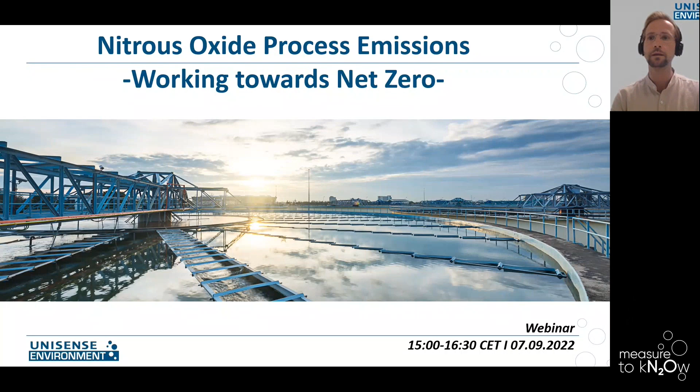Just a quick look at our format today. We'll have 1.5 hours, and we have 3 great speakers for today, representing the leading Danish utilities and universities. Each of the presentations will be 15 minutes plus 5 minutes of Q&A. After the presentations, we will go into a panel discussion where Mikkel Andersen, our own CTO, will join as well, and we'll get to discuss some broader questions.

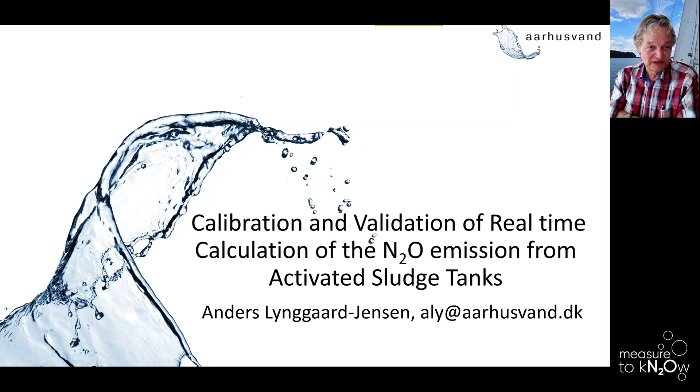Looking forward, thanks a lot. I'll try to share my screen. Yeah, what I'm trying to present today is some practical experience with measuring nitrous oxide and some of the problems and pitfalls that we see, so that you all don't make the same mistakes as we have done.

So the overview is here: how we measure the off-gas flow, how we measure nitrous oxide in off-gas, and how we measure nitrous oxide in the activated sludge, and then the calculations that bind these things together, and then compare the measured and calculated things, and then a few concluding remarks.

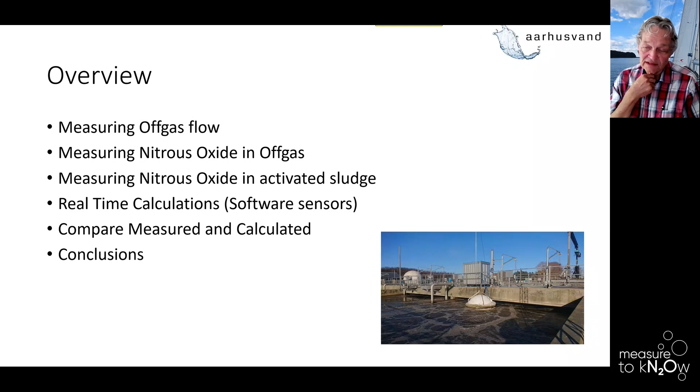So let's start with the equipment for the off-gas measurement, which consists of a hood that you can see here on this slide. Can you all see my arrow? Yes, we see that you will see a pointer.

Fine, good. So what we have here is a hood where we measure flow and off-gas, and we can see that it's located in an aeration field on an activated sludge tank, and this is in fact the Egå wastewater treatment plant in Aarhus. Here we are just in measuring mode, so we are measuring both nitrous oxide and the flow coming up into that 1 square meter hood that we have here.

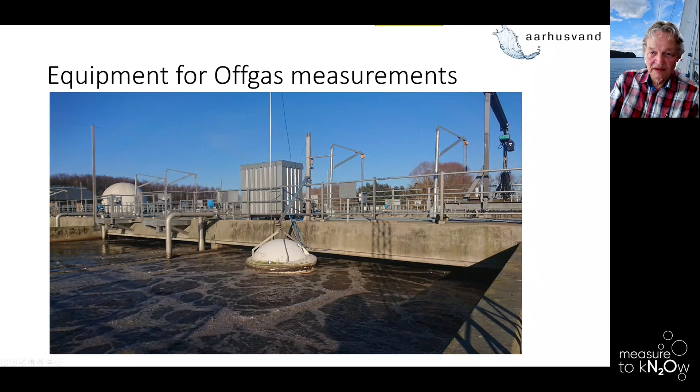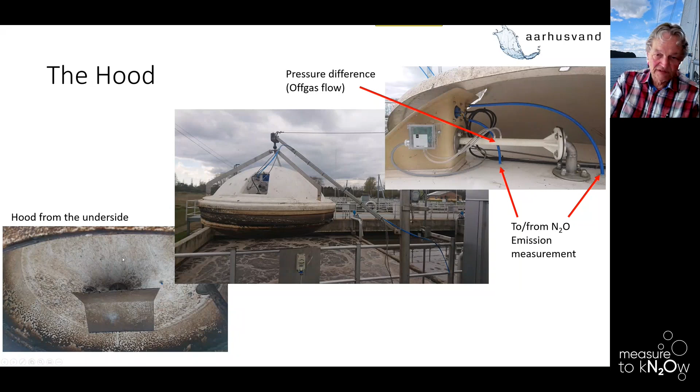If we look into the hood, we can see that we are measuring the flow with a pressure difference, and we have some tubes here going to and from the nitrous oxide emission measurement, which is an instrument I'll present later. We can see the hood here when it's taken up in the crane, and from here we see the hood from the underside. We can see the small tubes where we are sucking in the nitrous oxide mixture, and there's another one, which you cannot really see here, where we are pumping back so that we are not jeopardizing the flow measurement in the hood.

This is the setup for that, and when we are calibrating this, we have made some equipment where we have a diffuser that we can put down and place under the hood. We can see this diffuser pipe is now under the hood, so we can put an airflow to that and measure it during the calibration. We also have the airflow coming from the normal aeration system of the treatment plant, where for this tank we have 6 aeration fields, but we can close down all of them and just use this pipe in order to take the flow that we want.

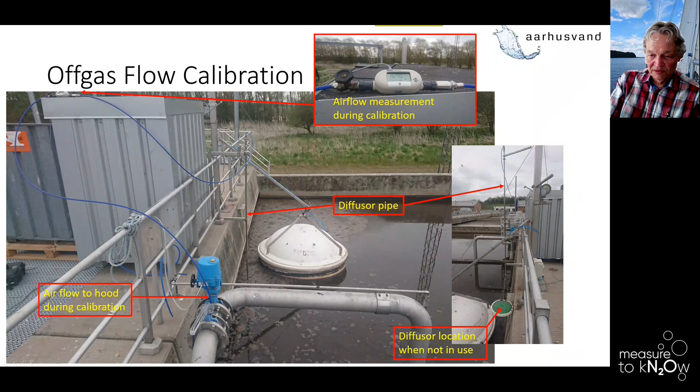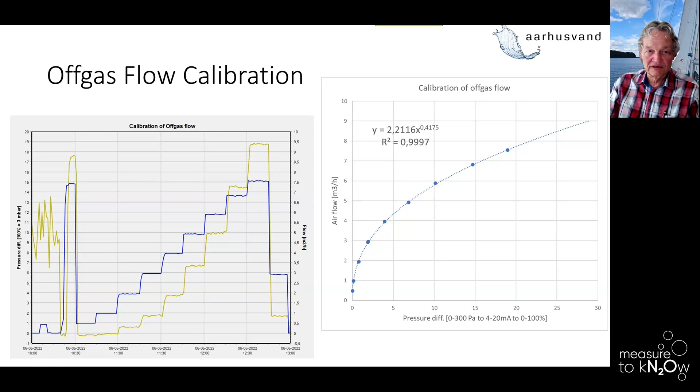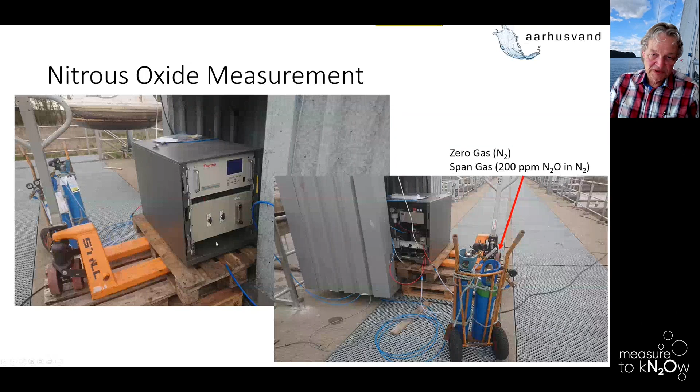Then we have the nitrous oxide measurement with the hood. This is an instrument from Thermo Scientific, which measures using infrared. We have 2 calibration gases, a 200 ppm in pure nitrogen, and a pure nitrogen gas, which we can put on the system. We have a gas pump where we're putting the sample in, a gas cooler, and a filter so we are not getting anything into our instrument.

We can put calibration gas on, we can put zero gas on. We have an exhaust that is going back to the hood, and we are using about 1 liter per minute in the instrument, while the pump is giving about 5 liters per minute, so we are putting back that flow again, not to jeopardize the flow in the hood, even if it's much smaller.

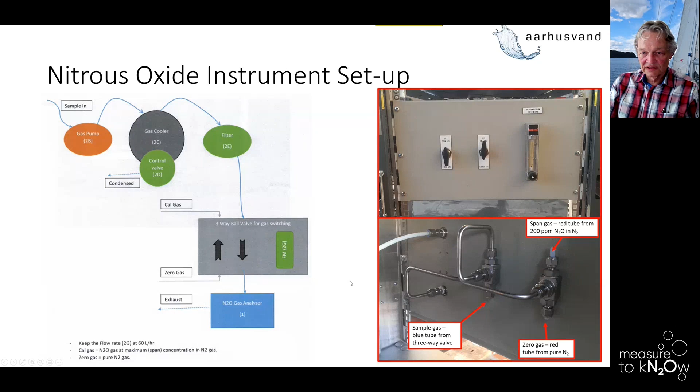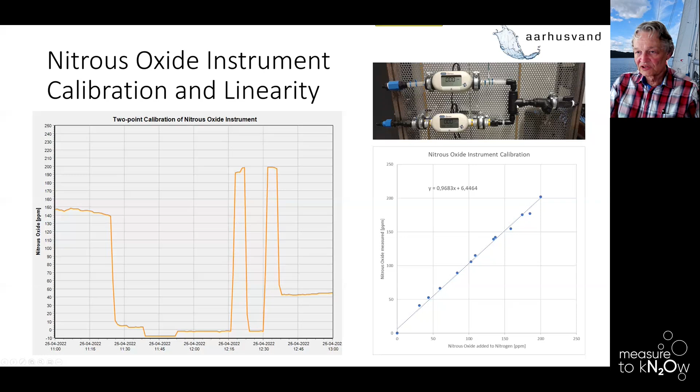You can see that we have different equipment here so that we can calibrate the system. When we are doing that, we can see that we are coming up and down between 0 and 200. We have also been checking the linearity of the instruments, where we have 2 flow meters with the span gas and the zero gas, which we can mix in different ratios to check the linearity of the instruments.

When we are setting up everything and doing our real-time calculations, we now have a system where we can measure the off-gas pressure difference and the flow. We also have a filtered flow, shown in light blue, because we need to filter it. You can see how much noise we have from the pressure going into the flow, and then we have the filtered flow. We have the off-gas in ppm, which we recalculate into a concentration in milligrams per normal cubic meter. By multiplying those two figures, we can get the emissions. So we have the red one, which is our emission from our off-gas measurement, completely independent of anything else on the treatment plant.

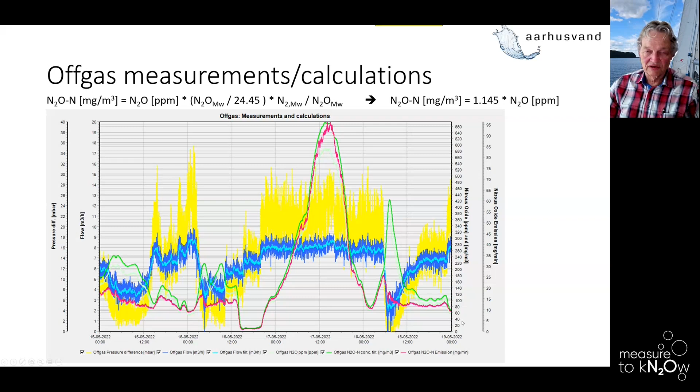Then we are having the other system, which are the sensors installed at the treatment plant. We can see here we have the aeration tanks at the wastewater treatment plant. We can see the flow going through. We have an anaerobic pre-tank here, and then we have the 4 aeration tanks.

It's a plug flow system, coming out here. The hood that we just have been seeing is sitting here, so it's in the inlet tank and in the aeration field. We are measuring the nitrous oxide in these different locations in the tanks, and we are having flow meters on each of the tanks so we can see how much air we are putting into each of them.

I've just shown here some of the measurements we have been doing over a longer period, from the start of February this year until end of June. We can see that the nitrous oxide measurement in the activated sludge is changing a lot in this period.

So we are in fact having different periods here of how much it changes, and it's not just because we are experimenting a lot with the different controls. It simply changed with the same control. We simply changed level around April month. So it seems that we had some other population going up there.

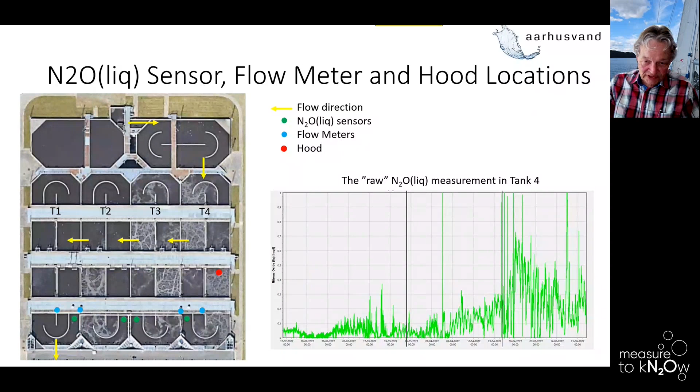So the nitrous oxide sensor, we are having 4 of those, and we are having 2 transmitters, and they're sitting there, just down in the activated sludge. We are having the flow meters that we use for each of the aeration manifolds - those are thermal gas mass flow meters that we're using there.

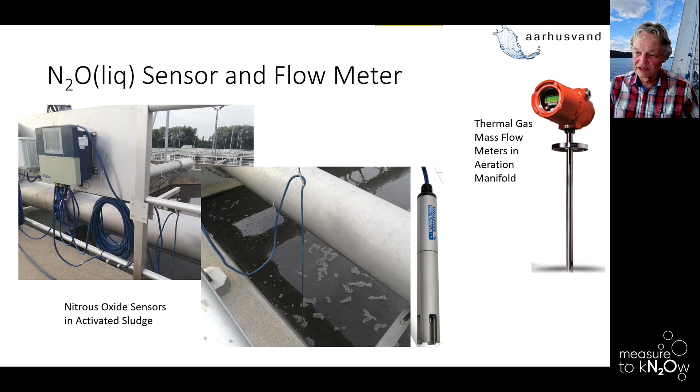Then one of the really difficult things here, when we are now starting to compare our results through the calculations, is how much is the aerated area? How much area is covered by the off-gas meter - saying that has 1 square meter, but how many square meters are feeding or evaporating from the tank?

If we try to calculate that from the cluster of diffusers, then we are having 45 square meters as the area of the diffusers. But when we look at the surface and try to estimate what the area is there, we are then getting approximately 65 square meters.

And of course that area is quite important in the calculations, and also the aerated volume and the non-aerated volume are quite important in the calculations. If we see that at the surface we can in fact see 1/3 more than what we have in the diffuser area, then the volume maybe should be calculated from the mean between these 2 areas here, because we're having a rhombic figure there for the volume. So there's something to work with there.

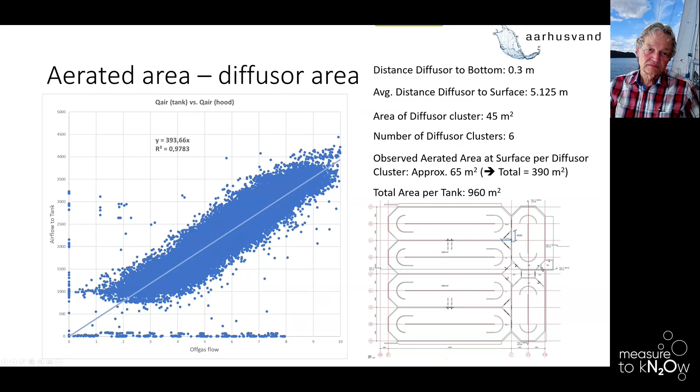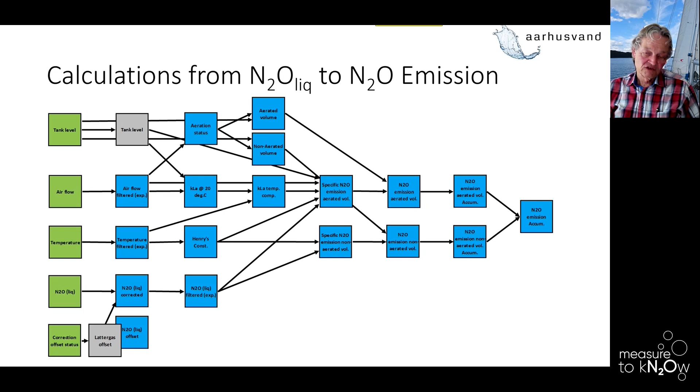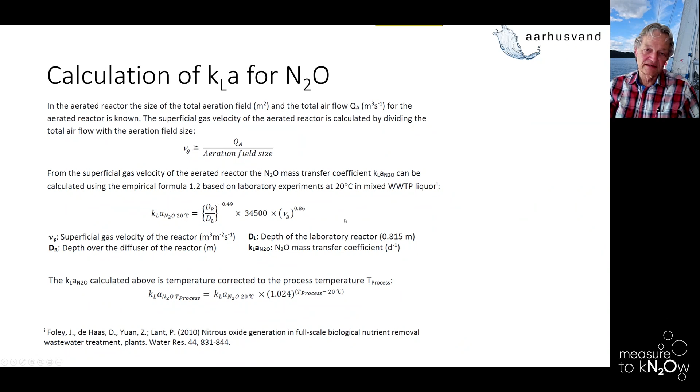So if we look at how we calculate it, you can see this afterwards. I will not use any time for looking at these, but this is the calculation of the KLA for nitrous oxide, and we are doing exactly that in the system every minute. We have the calculation of Henry's constant, which we also do exactly like this every minute.

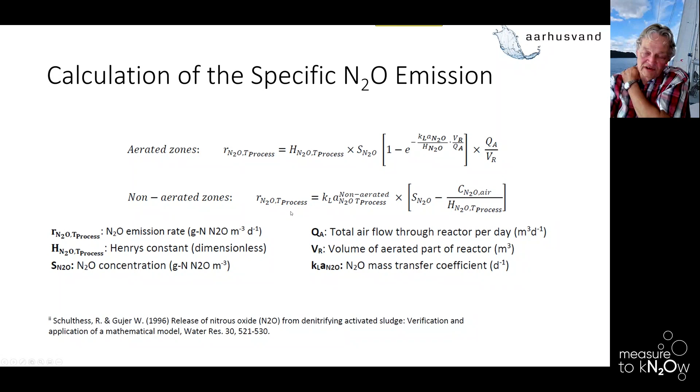Then from that we can calculate the specific nitrous oxide emissions, and we are calculating that also from literature here, and the aerated zones is given by this, and the non-aerated zones by this equation, and you can look at that afterwards in the slides that you have in the PDF.

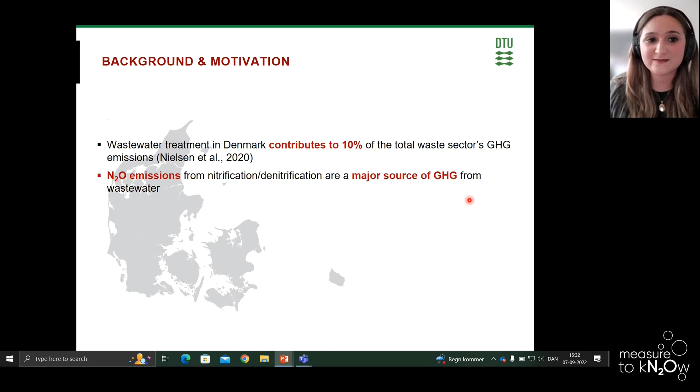How come do we need to look at N2O in wastewater treatment? Well, basically, wastewater treatment in Denmark contributes to 10% of the total waste sector's greenhouse gas emissions, and N2O emissions from nitrification and denitrification are a major source of greenhouse gas emissions from wastewater. But we also know that wastewater has been considered a resource in water resource recovery facilities, where we can recover phosphorus, for example. In Denmark, we also have approximately 51 plants that produce biogas and then energy.

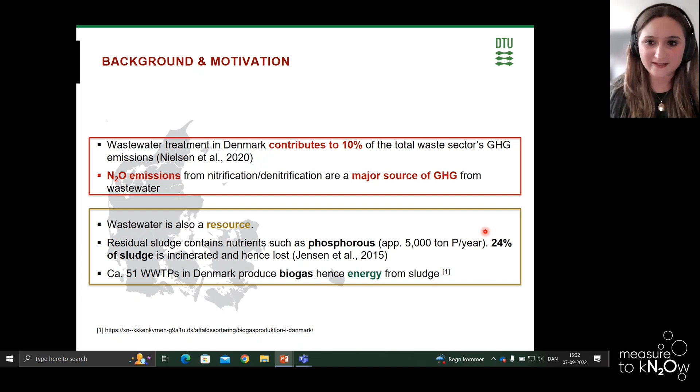So we have this double phase of wastewater treatment. On one side, future water resource recovery facilities need to reduce direct emissions, especially of N2O and methane, but on the other side, to achieve climate neutral plants, we also need to recover as much resources as possible, and do it sustainably. So we need to make sure all these processes happen in a very sustainable way, which means quantifying a broad range of environmental impacts.

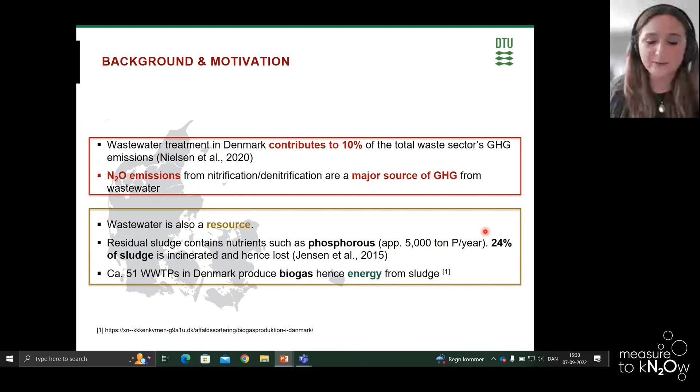Today I'll focus on a specific case study: a plant in Copenhagen called Avedøre wastewater treatment plant. Avedøre has a capacity of 400,000 PE and also produces energy. The future strategy for this plant is that the wastewater operator, Biofos, wants to retrofit it into a water resource recovery facility by 2025. This is aligned with their goals of reducing CO2 emissions, recovering more energy, and recovering more nutrients and other resources, so they can achieve climate neutrality or even be climate positive.

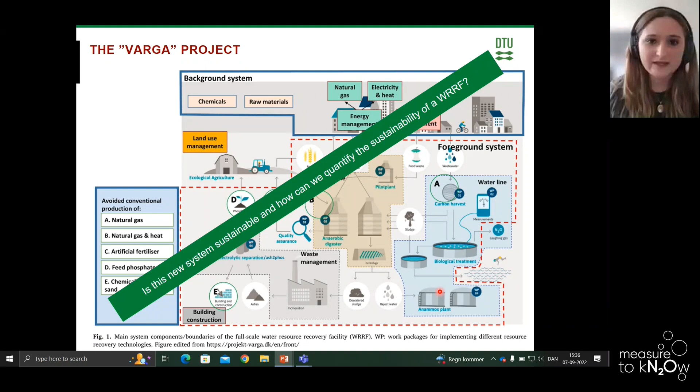So in order to quantify the sustainability, and therefore a broad range of environmental impacts, we need to calculate these impacts. Specifically in my PhD, I combined both economic assessments with environmental impact assessments. According to the methodology I used, the eco-efficiency methodology, when we perform environmental impact assessments, that needs to be done with a life cycle assessment. It's a must in this type of assessment. In this specific case study on the VARGA project, we also based our evaluation on mass and energy balances, and we also calculated the CO2 abatement costs.

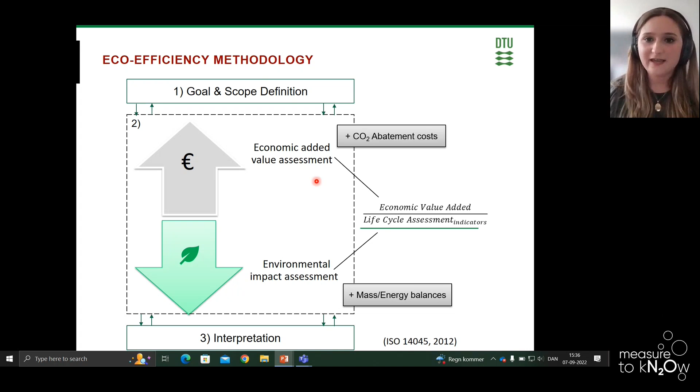What is the goal? Basically, we want to address whether the new technological advances are improving the environmental performance of the system, of the new plant, compared to the existing plant, as well as if they are actually increasing the economic value compared to the existing plant. So that is the goal.

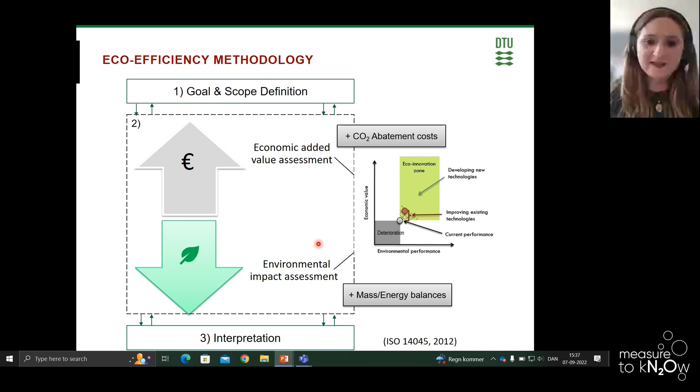But today I'll focus primarily on the environmental impact assessment and the life cycle assessment. Given that I didn't know if you actually had a background within LCA, I thought to provide a brief introduction to LCA.

The life cycle assessment basically enables us to perform a holistic environmental impact assessment from cradle to grave, where we make an inventory of all the material consumption and emissions along the life cycle of the system, in our case a treatment plant. So we go from material generation to final dismantling and disposal. We make an inventory of all this input, including transportation, but also very important, all the direct emissions to air, like N2O, emissions to soil, emissions to water.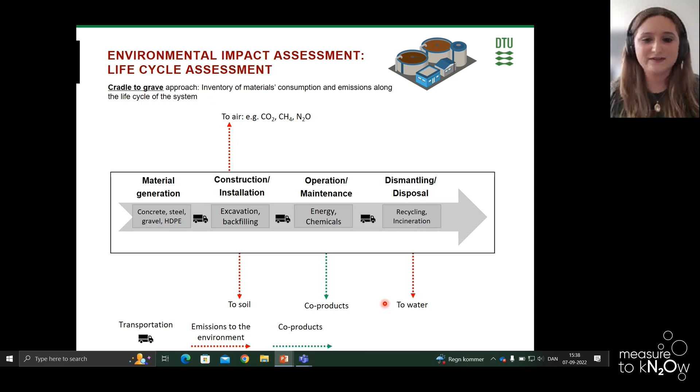Because we want to assess a water resource recovery facility, we also know that we have co-products, and these co-products can be energy, for example biomethane, heat recovery, but they can also be just fertilizer, so phosphate fertilizer. Each time we are recovering a product and exporting this product, we are basically substituting or avoiding impacts of other conventional production of this co-product. So that is also very important.

With the LCA, what we do is to move our decision support tool from being only focused on carbon footprint to a very holistic tool, where we not only have the climate perspective, but also look at another broad range of environmental impacts, for example resource depletion, eutrophication, or ecotoxicity.

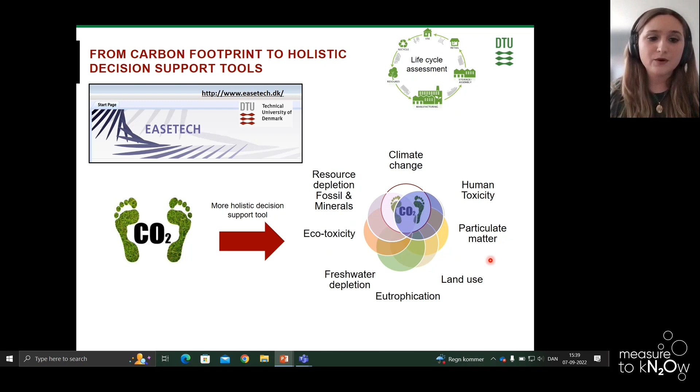And I told you we need to make this inventory that you probably know from the carbon footprint assessment, and we need to model our system, model our plants. In my university, we use the software EASETECH, and in the end, after we model all the inputs and outputs, we get this environmental profile that tells us the performance of the plant in different types of configurations. So here you can see you do not only focus on climate change, but maybe you might have other types of problems in other categories, for example.

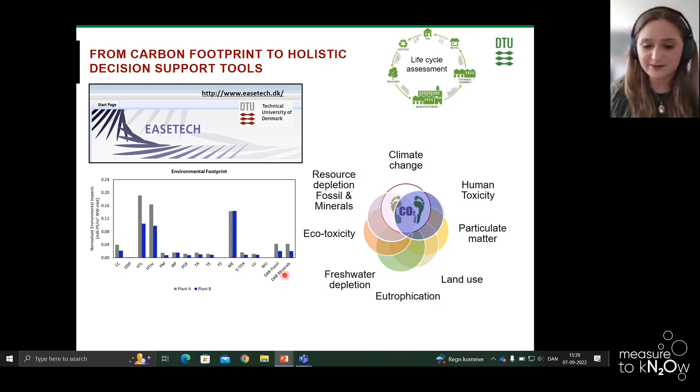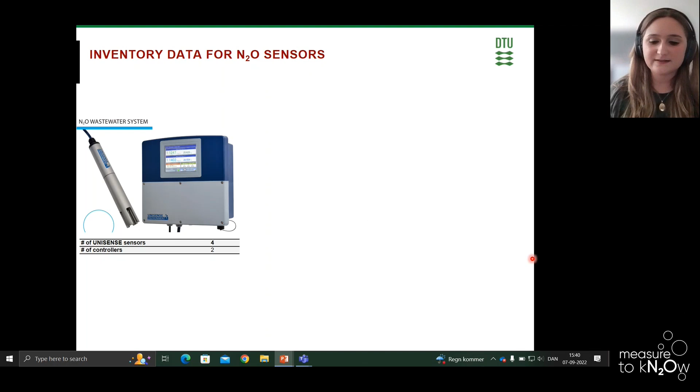So also on the equipment side, that means we do not only take the benefits of the sensors, that enable us to perform real-time measurement and control and therefore reduce the N2O emissions, but we are also looking at potential background impacts from the material.

We looked into the material and transportation, but very relevant is the lifetime, because even though this component is very small compared to other components, it's still important to understand, at the early stage of design and planning, the lifetime of these components. For example, the sensor head needs to be replaced every 6 months, the sensor body every 5 years. But when we define our time horizon, for example 50 years, we need to understand how many times we need to replace these components.

So in the end, this component, the sensors, compared to other technologies did not impact the system or provide additional environmental impacts compared to other technologies, but it was still good to include it in a life cycle perspective. These are the kind of inputs that we need for performing an LCA assessment.

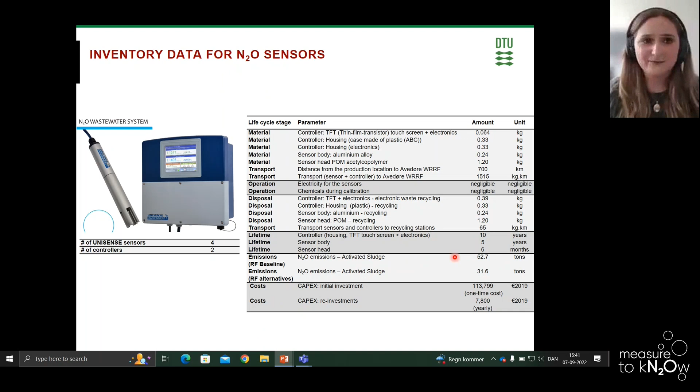Given that the project is very big, I would like to guide you through the alternatives that I have defined in order to perform this evaluation.

So the baseline plant is a conventional plant. We have activated sludge system, anaerobic digestion, dewatering, drying and incineration, and then biogas upgrading, which in the baseline scenario we assume is performed with amine scrubbing.

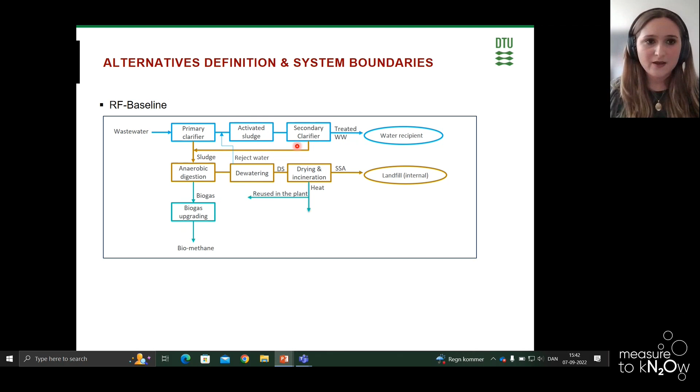So in this baseline, we do not have real-time measurement and control of our N2O emissions from the activated sludge. When we retrofit the plant to a water resource recovery facility, we are touching a lot of processes. The boxes marked in pink represent the novel technologies in this water resource recovery facility.

Specifically today, I will look at the effect of the N2O sensors in the activated sludge and the real-time measurement and control. I'll also touch a bit on the Anammox process and its potential effect of increasing N2O emissions.

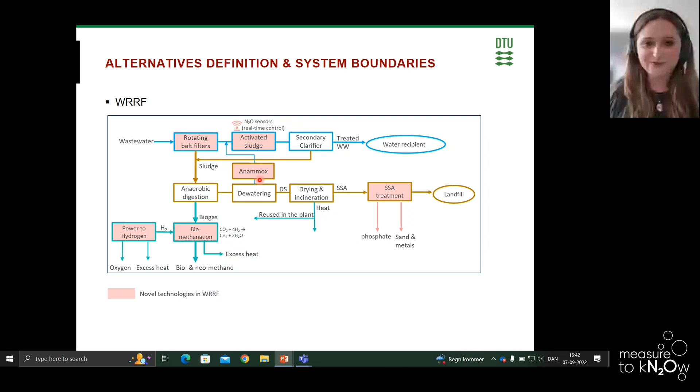As you can see, in our water resource recovery facility the complexity increases, and therefore you need to understand the contribution of the different processes out of the net, out of the total emissions in the system.

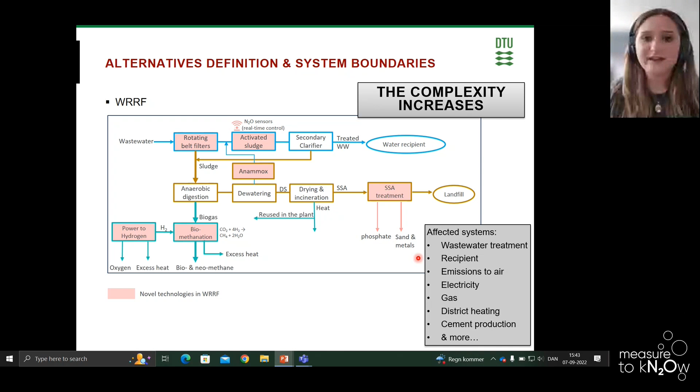I would like you to focus primarily on 3 alternatives: the baseline, the RF N2O - that is basically the baseline plus the real-time measurement and control performed with the sensors - and then the final one, where we have all the technologies included in the Varga project plus the anammox.

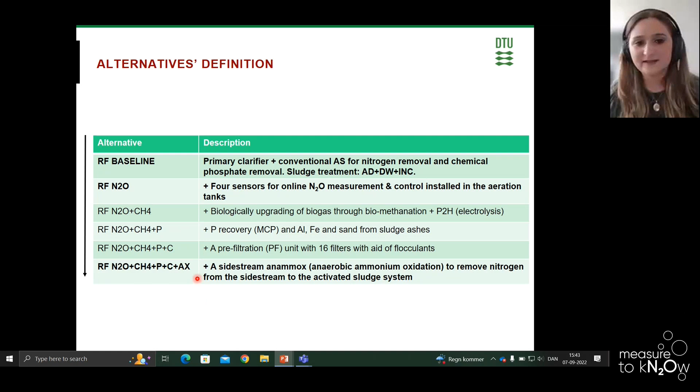So in the beginning, I told you that I based my assessment on mass balance and energy balance. I just would like to give you some figures in relation to the N2O.

When we look at the baseline performance, the estimated emission factor was 2.6%, while when they implemented the control with the sensors, and they made some measurement campaigns where they implemented some types of controls on the DO level, then they could get down these emission factors to 1.6%.

And that is even actually a very conservative estimation, because I know that from the latest results, they could even get a higher reduction than what I have included in this study.

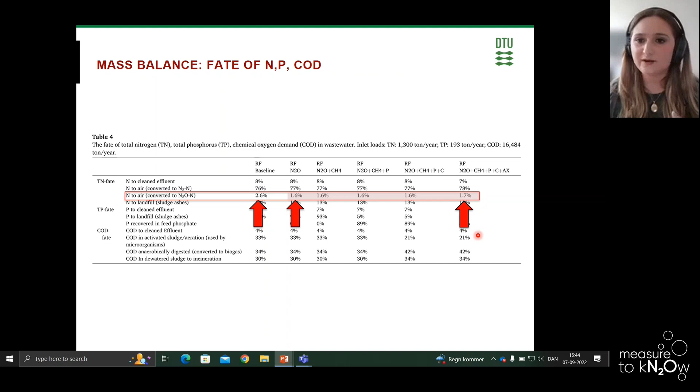With anammox, if we look at the last alternative compared to the others, we see a slight increase of N2O, and that is basically based on literature studies - there are no measurements in this alternative.

But even though the percentage of contribution, the emission factor, is very low - 2.6%, 1.6% - it actually contributes a lot to the climate change, to the carbon footprint of the entire plant.

So if we look at the major contribution of the positive emissions in this plant, these are coming from the N2O. So it's very, very important that we bring down these emissions.

When we implement the control, the real-time measurement and control, then we achieve a very high, or higher, reduction compared to other technology. In this case, a very conservative estimate is approximately 35%.

When we look at the anammox, we could see from literature that one of the downsides of the anammox is actually that it may increase the N2O. So there is a slight increase compared to the other alternative.

Overall, I have to say that just by looking at the direct emission, you can reduce a lot of CO2 equivalents. So if you can bring down the N2O and the methane emission, that would be a very good thing for your plant.

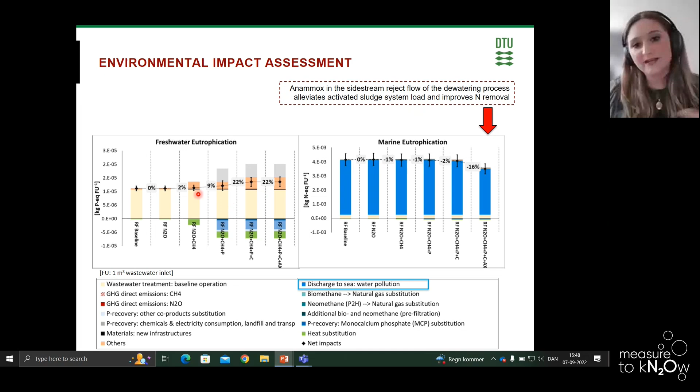Just a little bit about the economic results, the financial results. I calculated the CO2 abatement costs, and we performed this economic assessment. By looking at the cost and how much CO2 is reduced, we could calculate that the cost for implementing real-time monitoring and control is about €2 per ton CO2 equivalent avoided. This technology is quite cheap compared to other technologies and can bring down a lot of N2O emissions, and therefore CO2 equivalent.

We also tried to internalize the CO2 equivalent with a CO2 equivalent allowance price. At the time, in 2019 when I performed the study, it was very low - about €25 per ton. But if I had to remake this assessment now with the Danish carbon tax, it would probably look different, and the value added of all these technologies, including real-time monitoring and control, would be much higher than the baseline.

So in conclusion, I would like to say that just focusing on real-time measurement and control, this technology compared to others achieved the highest reduction in direct CO2 equivalent emissions with no significant impacts in other environmental categories. They were also the cheapest solution. Wastewater operators are in control of reducing the direct N2O emissions, also called Scope 1 emissions in greenhouse gas accounting.

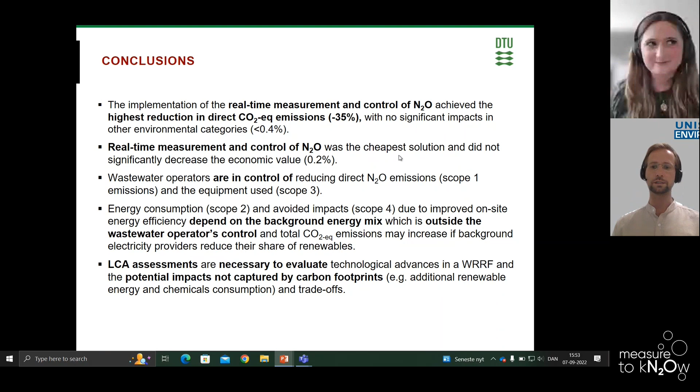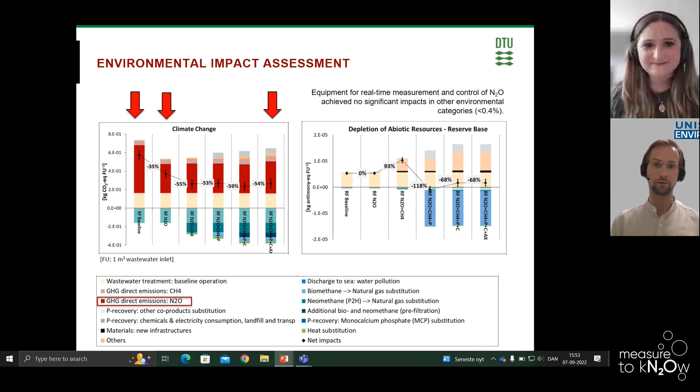We're a bit short on time here, but we have time for one question, from Michael Gerardo. He's asking about the approaches and technologies used for the real-time control of N2O, and what parameters were used in that process control. Perhaps the question can also be formulated: how did you get to that relatively conservative figure of 35% reduction through N2O process control?

That's a good question, and I expected it actually. I have to say that I didn't perform the measurements myself, so all the results I relied on come from other studies and from real time measurements and control strategies that were implemented. In this study, Chen et al. 2019, I provided a reference, and basically in that case, they reduced the DO level by 0.5 milligram per liter, and that's basically what I knew about the process. I think they also looked into the anoxic phase, the length of the anoxic phase. So I relied on results reported to me by the people who made these measurements and implemented this control.

Over the campaign period, they could achieve a range of reduction between about 30 and 60%. So then we used 35% just to be on the conservative side, because when we make this assessment, sometimes we are not fully validated, so we need to be careful on what number we put, also to avoid greenwashing and so on. But I have the reference to the study.

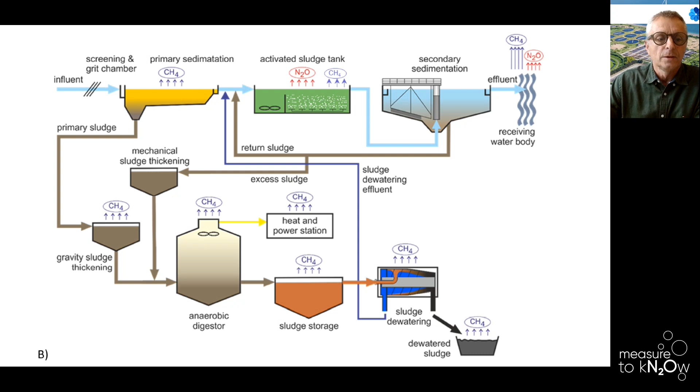And then we are looking at different emissions. Of course, the direct emissions are shown on this slide, where we take a standard wastewater treatment plant, where you have the emission of methane from the primary sedimentation, nitrous oxide and methane from the activated sludge, the biological part. And then we have something from the effluent in the receiving body. We have methane coming from different parts of the sludge treatment train, and that's the direct emissions.

But the assessment also included other emissions. So first of all, number one, life cycle emissions, like Maria has just been talking about, but this is from infrastructure, so all the concrete and steel were included as basic values.

Number two, emissions of dissolved methane in the sewer networks, so we looked also at standard values from the sewer networks. Direct emissions, what I just showed you on the previous slide, the N2O and the methane from the treatment process. And then emissions of COD and nitrogen in the effluents, also shown on the previous slide.

And then the indirect emissions, as Maria also touched on before, when we generate electricity, that's in the paper as well, and then also the emission credits, the ones that point the other way, the good ones, when we export biomethane, for instance.

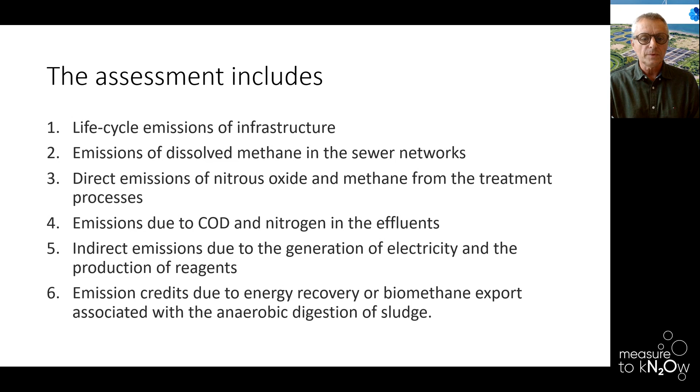And the scenarios treated in the paper are split up into different plant sizes and types. So you have the sizes, typically important for the next figure I'm going to show you if you haven't seen before. The sizes are above 100,000, all the plants that are more than 100,000 PE.

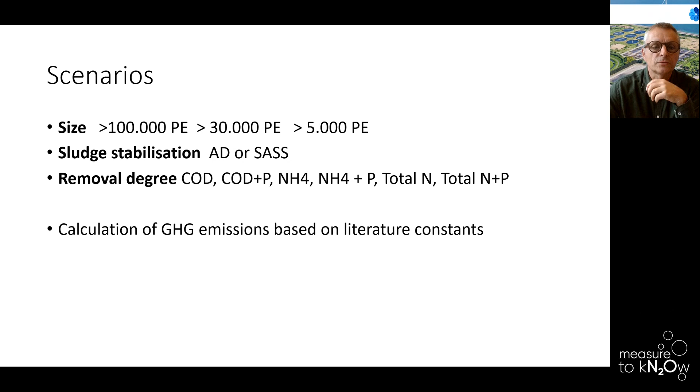Then the ones between 100,000 and 30,000 PE, ones between 30,000 and 5,000 PE, and also smaller than that. The sludge stabilization method has also been looked at - is it anaerobic digestion or simultaneous aerobic sludge stabilization, the SASS? And the removal degree, what kind of treatment do we have - levels of treatment, only COD removal, COD plus phosphorus removal, nitrification, and nitrification plus phosphorus, total nitrogen, so different levels of treatment. The calculation of the greenhouse gas emission was based on literature constants.

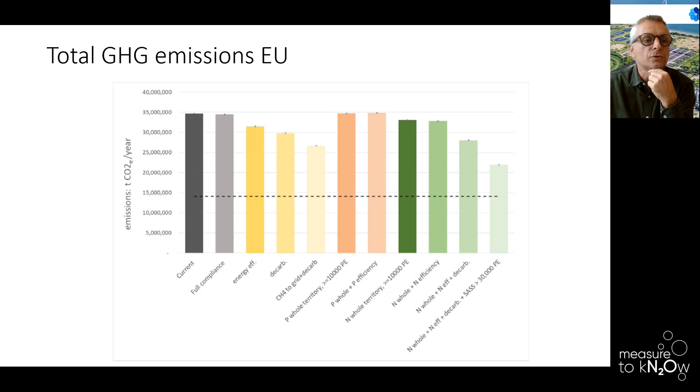The conclusions from the paper are that the emissions are somewhere in the area of 50 to 125 kilograms of CO2 per PE per year. So you could compare that to what else we emit when we take a plane ride to Asia or whatever. So it's not so much, but still it's important. The primary sources for this are nitrous oxide and power. Methane is second. Low or zero footprint from power is important and is expected.

In some of these scenarios I showed you, we were expecting to have electricity with no CO2 footprint in 2050. Full nitrogen removal and methane recovery are important tools in the reduction of carbon footprint. So that's actually an argument for improving the whole level of nitrogen removal in the EU.

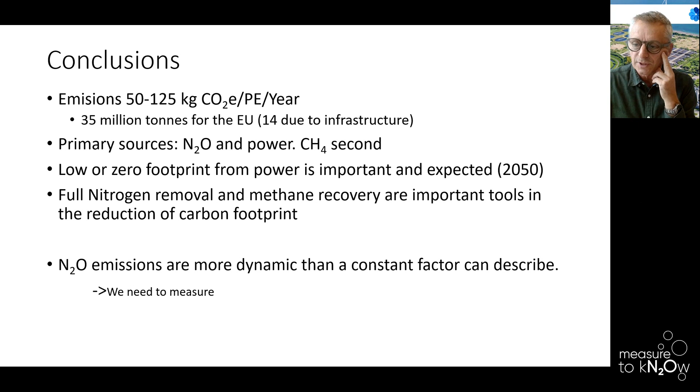And I think what was not mentioned so much in the paper, but what we see also, as you've seen today from Anders' presentation, is that the N2O emissions are far more dynamic than a constant factor can describe. So we really need to measure the nitrous oxide - I know Unisense will be happy for this message, but that's a fact. You have to measure the nitrous oxide in your plant to control it and to know where you are. And we see heavy variation all over the season, more in summer than winter and so on. So it's very important.

I think that's about my presentation, Bastian.

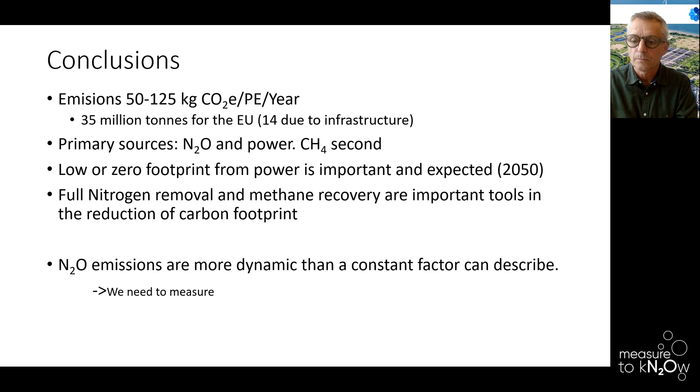Yes, thank you very much, Dinas, for this great overview. And thank you for your work in putting this together with the authors, and doing the bit at the EU to push forward to the common goal of reducing emissions.

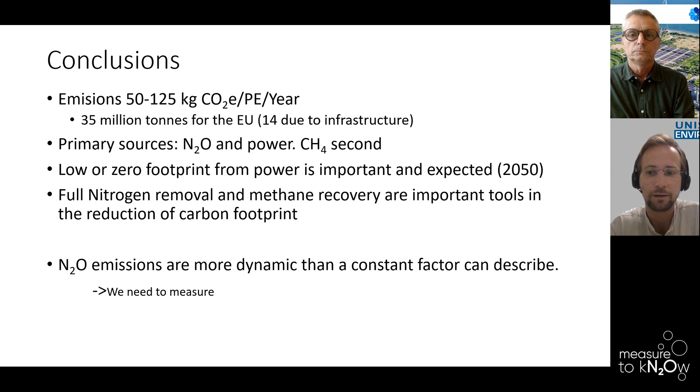One question that is coming up for me, since we're talking at this broader scale, EU level, maybe even globally - I would like to pose that question to you. What do you think is the best driver to actually make greenhouse gas reductions a reality? Of course Denmark has a special situation, but what would you propose for other countries? Maybe you can elaborate a little.

The short answer is money. No, but I think legislation or a CO2 tax - I think the world needs a tax for CO2. We are planning to have that in Denmark. I think it should be everywhere. And of course, if you have a CO2 tax which includes the nitrous oxide emission, then you would be motivated to do something about it. And as Maria actually showed, it's quite cheap per kilo ton of CO2 to do this, especially when you just install the sensors and control it. So I think that we need legislation and we need a CO2 tax.

I'm just checking. I don't see any questions in the chat right now.